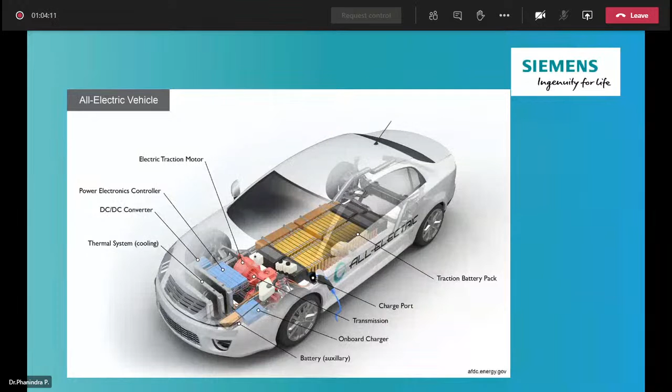Kamlesh, am I audible? Yes, you are perfectly audible. Oh, okay. I thought even the signal was lost. The format is that we have kept all the attendees mute at present. During the question answer session, I will give the permission to unmute. Oh, okay. I'll definitely be responding to your questions. Thank you, Mr. Aqleem.

So now, as I briefly said, digital twins are the replicas. Now coming to the heart of the subject, that is the battery. All this success will rely on the battery. What exactly should battery manufacturers be focusing on? If you want to develop your own indigenous battery, the first thing one has to address is to come out with a realistic model of the existing battery.

That means you procured a battery. There is a battery manufacturer recently with whom I was sharing the same. They were importing from China, and because of certain restrictions, it stopped. So the company is now in losses, or on hold in terms of R&D. They are trying to get it from the USA at higher prices. So assume you have brought your battery, what is the first thing you need to do? You need to convert that battery into a mathematical model.

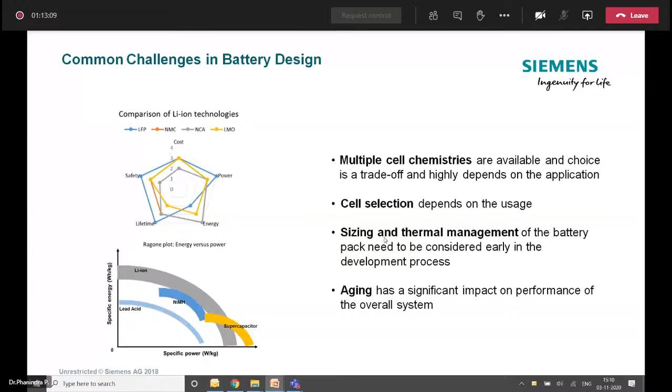So the engineering problems that we need to address: we need to choose a cell chemistry, size the battery pack, characterize the battery cell from experimental measurement, find out its suitability for thermal management, and then find out the electric drive line. Electric drive line means if I have a bunch of batteries in an automobile, how are they connected to give me the effective outcome voltage I am looking for? Series and parallel, we all know.

Can I connect all of them in parallel? If I connect all of them in parallel, I may get a good amount of voltage drop, maybe. Now, if I get that, am I going to utilize all the current in no time? Or if I connect them in series, maybe it will be summing up, so I may get better current densities. Then am I going to utilize the same current densities till my vehicle's last point?

And above all, am I going to consume all the energy density that is available by the time I reach my destination? If that is not happening, then it may be a disaster. We may stop the vehicle on the road itself. Now, how to arrange this and how to connect this is going to play a very dominant role. So drive lines are very important, and at the same time, aging.

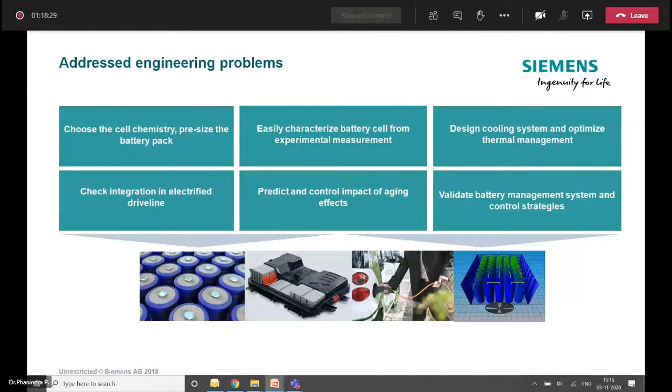So now, when I try to utilize a digital solution, that is a modeling process for batteries, we need to address different levels. The first thing is microstructure electrochemistry. Now, what is microstructure level? I have an electrode, or say layers kept on each other, but these layers need to be manufactured. So when you try to manufacture a particular layer of battery material, electrode material, by doping certain ions, which is your patented ion technology, homogeneity is expected.

But are you going to get the homogeneity right away? It is always verified by SEM technologies, and now maybe some advanced technologies. I personally have seen SEM being utilized for finding out the ionic distribution. So this needs to be verified to find out whether lithium cobalt has been properly and uniformly placed in the collector. It should not happen that it is at very high density in one place and in another place it's not available at all. So the uniform distribution should be there.

For that, absolutely the digital solutions are going to help. At the same time, experiments are also done in this area. A very large number of experiments are going on. And the second one is, okay, fine, at the electrode level I have a chemistry ready. Now, can I develop a battery cell? Then in a spiral, or say a pouch battery. These are the two batteries.

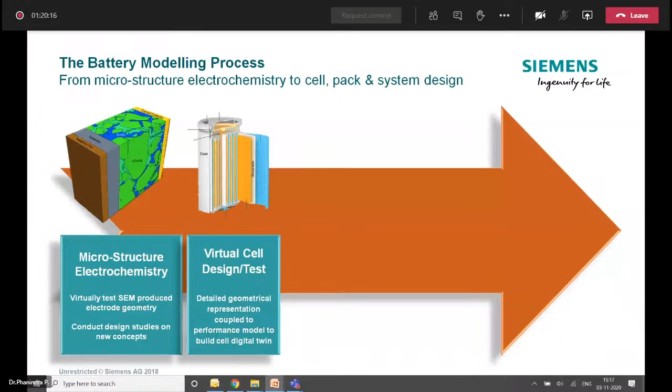Well, what is the pouch battery? A pouch battery is what we see in our mobile phone, in short. And what is the spiral battery? The one that we use in cameras or wall clocks. It will be like that. I'm not saying it is exactly the same, but it will look like that. With different layers, the number of layers and density is different, but the output will look similar. So the wall clock one is like a cylinder battery, and the one you use in the mobile phone is like a pouch battery.

Now with these batteries, once I create them using the electrodes that I developed in the laboratory, is it going to sustain? The biggest question is whether the design is possible or not. For that, we have a dedicated software called Battery Design Studio, in which we create this geometry. We give all the inputs of electrolyte, this much volume, and density, this much volume.

We keep all those inputs, and then the first thing that we are going to see is whether that design is practically possible or not. It may happen that we calculate theoretically that I want to use an electrolyte of say certain ml. I have added them in a solid electrolyte.

I have created doping, everything I have done. When I try to create a battery, my battery size may be increasing by 2 or 3 mm. Now, if we see from a single cell point of view, 2 to 3 mm increase in the battery size is honestly nothing. 2 to 3 mm, sometimes we may say it's a measuring error, right? In our engineering laboratories, we try to do some experiment, we say, okay, 2 to 3 mm is fine.

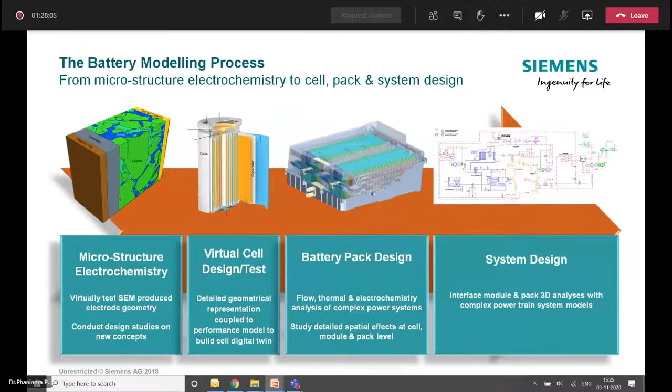So with this, I would like to give an overview of what is BDS, because along with the product, I would like to discuss its possibilities, what can be addressed by the product, and at the same time, what is happening in the real world that cannot be addressed. This way, I will show from an industry point of view what things are possible.

And the alkali part is the leftover area from an R&D point of view. It has been found from experiments that alkalis are highly corrosive. That is the reason many countries are not interested. But when it comes to India, I strongly feel alkali should be the area we focus on, because from a mineral point of view, we are blessed with a lot of alkali metals. That means utilizing indigenous materials could be an area. So our software BDS can also be utilized to incorporate those inputs from the laboratory.

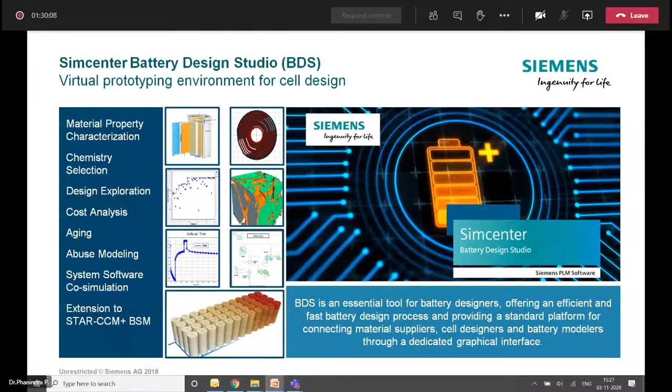So what we generally do in any battery pack analysis at my place is take BDS, design the battery here, and then export it for thermal level analysis.

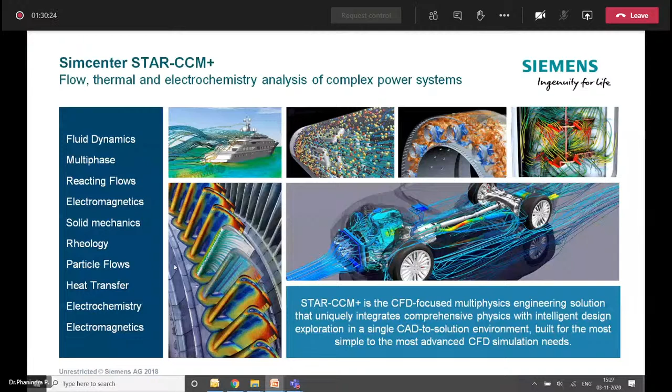Thermal level analysis is done in three-dimensional computational fluid dynamics software, STAR CCM+, which can address fluid dynamics, multi-phase reacting flow, solid mechanics, rheology, and so on in detail. AMESim is used as a one-dimensional tool where we try to use all of them and then go for system level synthesis.

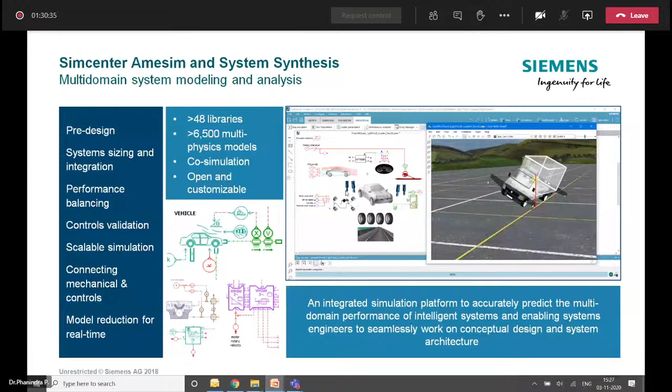We try to create electrodynamic potential models and see how these ionic movements happen in clusters, how they form a deposit, and how effectively the entire surface area of the battery is utilized. This kind of binder network analysis and lithium concentration, how much total concentration, we try to extract. Honestly, this is an R&D area.

When I was speaking to Kamlesh, he told me to share R&D areas too, so I'm just sharing. Please don't take me the wrong way. I know there are many faculty members here already well versed with all these things, so don't take me the wrong way. I'm just sharing what I know. You can correct me if I'm wrong, I'll be happy to learn from you.

Having said so, battery concentration is going to play a dominant role. A very recent update is Tesla: initially it came with a smaller battery size with high energy density, and they launched a vehicle that became a revolution, called a 2019 revolution vehicle.

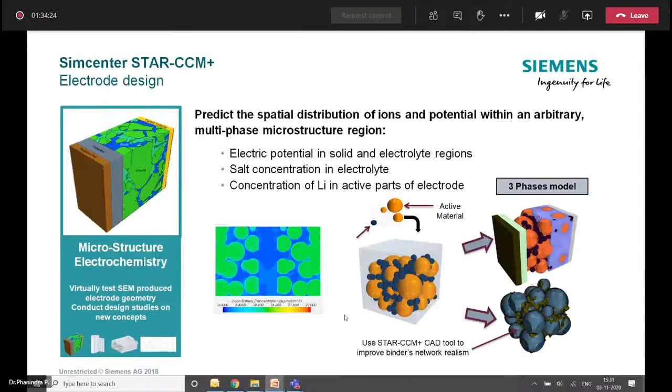The next area is developing equivalent circuit models. How can you develop an equivalent circuit model? We have duty cycles: I will charge to some voltage, then allow the battery to discharge. For example, I receive a battery of 5.5 volts, I discharge it for a particular time, and we measure the drop in overall charge. This is called the duty cycle.

When we import a battery, say from China, Europe or the USA, how do we develop a model for it? We take the battery, conduct a duty cycle test on it, and find how the voltage drop varies with time. Similarly, how current density varies with time, and power density varies with time, and then we fit these into established mathematical models.

So once we try to develop these equivalent circuits, we try to refit in the BDS and see whether the entire battery is represented - whether the battery representation along with the electrode and thermal management is appropriately represented in terms of voltage and current varying with time. We should do all these cross verifications. Once you have a battery and a model, believe me, you are the king of that particular subject. From there, all the down-the-line R&Ds, that one particular input will open doors for 100 opportunities in terms of thermal management, like what you are seeing here.

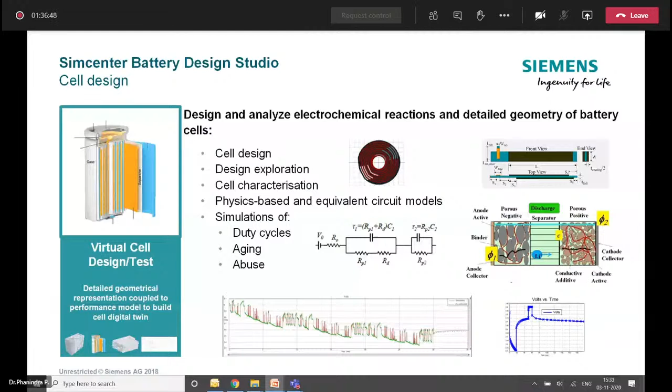But of course, when it comes to thermal simulation in his thesis - naturally he did this a long time ago, now he would have become quite senior - in those initial days, he was trying to take a uniform conductivity of the batteries. Uniform conductivity means in the lateral direction the heat conduction is very high, but in the longitudinal direction he gave very low resistance... very high resistance, so he was forcing the heat to move. Whereas practically, anisotropic conductivity exists for batteries. So from a thermal management point of view, finding out this effective anisotropic conductivity of the battery is again a challenge - one more R&D area.

A lot of models are trying to come out. Some say electrothermal simulation, others say 3D distribution and complex cooling system models are developed. But still, if any of you are interested in this R&D, you can take it up as a challenge - come out with your own isotropic or anisotropic models of conductivity within the batteries. That is one more area, because using these, all the software can find a very good feasible thermal solution.

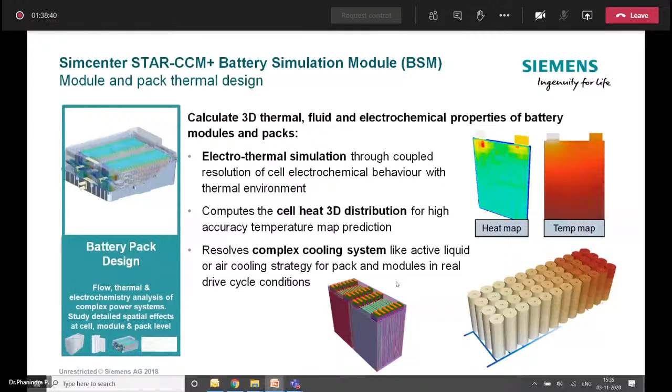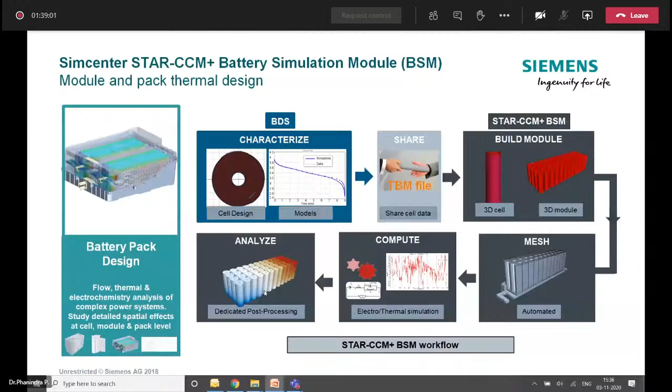Now after this, we take the process like this: using BDS, we create a cell, build a simulation model, mesh it, compute, analyze it, and then take it to the next level - AMESim. Honestly, AMESim is the last stage currently where you will be testing. Any automotive major industry will have a number of licenses for this, because they have to test it before it goes to final outcome - the production, pre-production test phase.

At that time, they try to find system level solutions, where we find various mathematical models developed at battery level, battery pack level, as well as the integration of the battery pack level, and if you're developing your own indigenous vehicle altogether. Like IT students coming out with their own self-balancing, auto-balancing vehicle - it's a very good vehicle, they don't need a stand. The vehicle stands still without using an actual stand, using an effective ABS system.

So if you come out with such a thing, you need to develop a mathematical model for all that, and then it needs to be validated and incorporated in software like AMESim, or if you have MATLAB, you can develop it effectively. That is again a pending area where dynamic models, static models, aging models and so on and so forth are being developed rapidly across the globe, and the door is very widely open. It's an ocean, honestly.

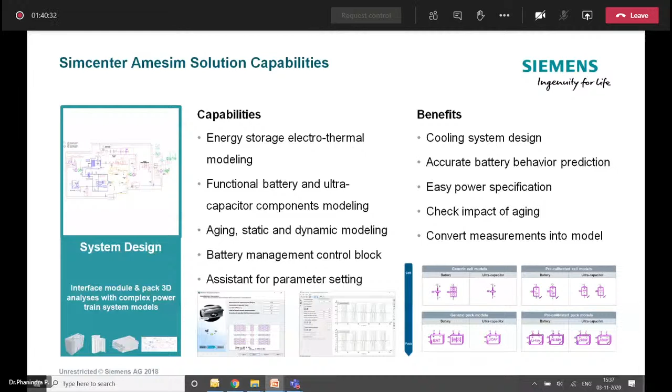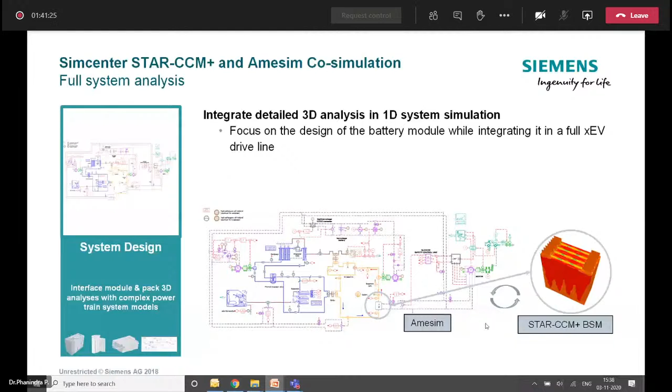When we try to use these two effectively, we can find out with a very good analysis, the full XEV - simulation wise electric vehicle driveline - the entire thing has been found with coupling both these things. Sometimes we also try to use Star CCM Plus, component level integrated with the system level, and then we ask for optimization. As I was referring, in the HEEDS multidisciplinary design optimization, we try to give a task wherein we find the most suitable component configuration that can really fit at the system level also. We create all these as design variables and incorporate it. This effective combination helps much more in saving by all means. So like this, as I was telling, with HEEDS MDO, we try to do designs.

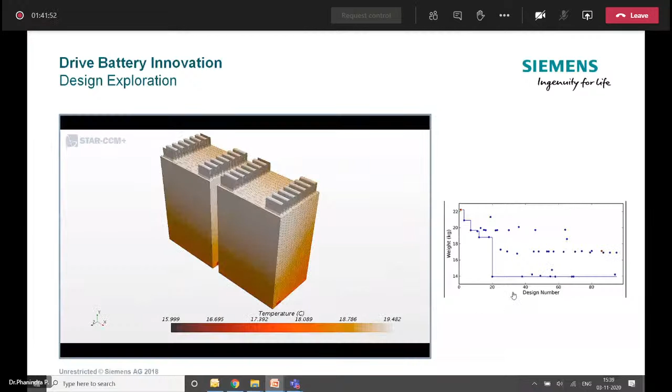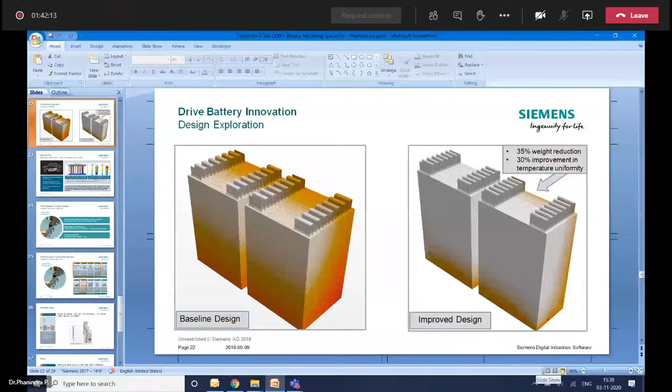Now we have a challenge here to reduce the size and increase the thermal capabilities. You can see the temperatures at different sizing combinations as we vary them, and we wanted to reduce the weight also. So we found various designs and combinations using digital methods, and found the optimum design. The reduction in weight was found to be 35%, and 30% improvement in uniformity of temperature. This was achieved easily using the multi-design optimization approach, which includes Siemens' Sherpa algorithm, a patented algorithm we utilize for achieving these tasks.

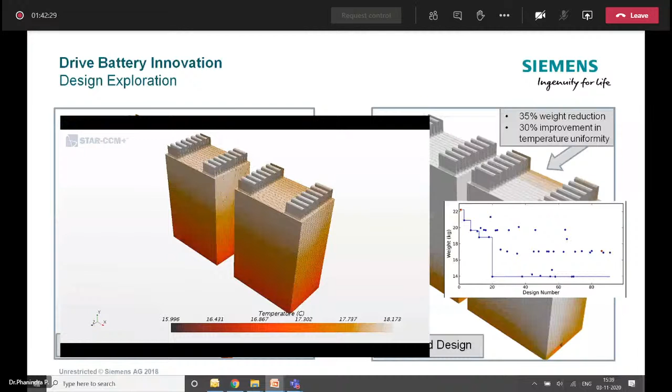There was another vehicle manufacturer, if I'm correct, Hyundai. They tried to come out with a car where, instead of these battery packs, they fit a big pouch cell battery that could take care of continuous electricity supply for about 480 - that was 500 - kilometers. That was their stake. But what happened with both this and the big pouch battery was that the biggest challenge was structural stability, which I haven't briefed here.

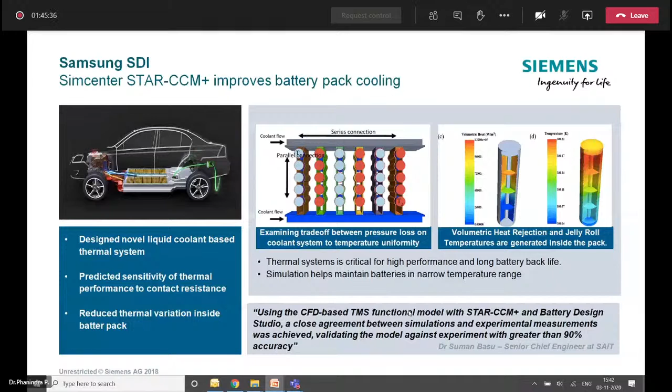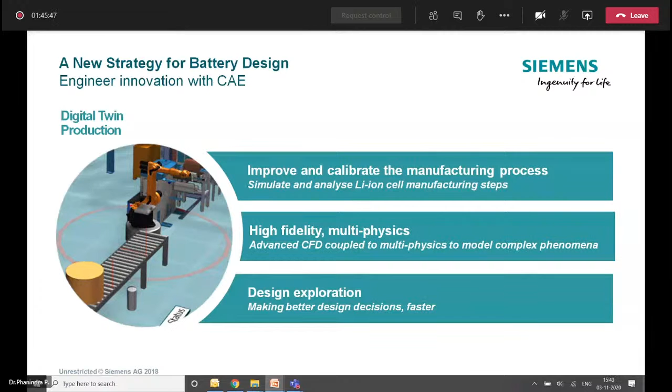So when I try to see digital twin production, it is more about calibrating manufacturing, high fidelity multi-physics and design exploration. So now I'll move on to the next one, where we will discuss challenges like this. That means electrolyte I want to fill. Can I effectively fill electrolyte very fast with a design that is suitable for filling it very fast? I mean, it may have uniform.

If you keep a cylinder, it may occupy all this volume. Instead of all the volume, I want to use a volume that will carry optimum space. So such component manufacturing decisions need to be taken. So CFD analysis can help you in design optimization. But at the same time, whether manufacturing feasibility should be there or not, we will try to see in the next slide.

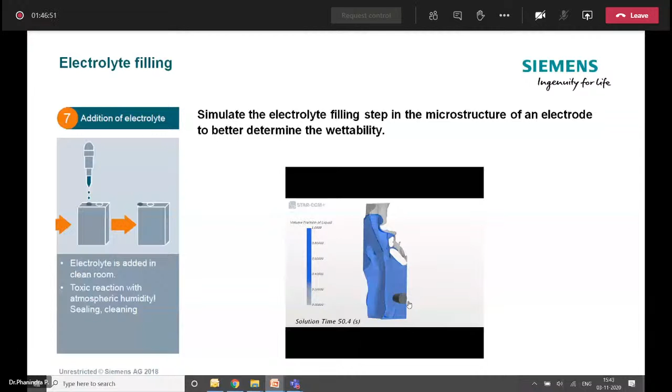So meanwhile, does any one of you have any doubts till now? Would you like to ask, or shall I proceed with the battery manufacturing challenges for a few more minutes? Okay. You can continue. I'll just see if anybody has put a message. No, there is no message. We'll take the questions at the end. Okay, sir.

Now, when it comes to manufacturing of EV vehicles, the challenge is not just the battery availability or its size. It's more about the number of batteries that we can produce and fit in the automotive vehicle, and how fast we can develop the pack and deliver. Say Tata Motors wants 1,000 packs and another company wants 100 packs. These are called contract manufacturers.

Like Amber Enterprises in India is a contract manufacturer for all kinds of air conditioners. You take Samsung, Blue Star, or LG. You buy any air conditioner. Technology will be slightly different, but the contract manufacturer remains the same. That is Amber Enterprises. That's why I guess they are getting popularity nowadays. So similarly, the contract manufacturers are under high stress, so they need to understand how to address these challenges. If you can address the challenges upfront, you can do much better.

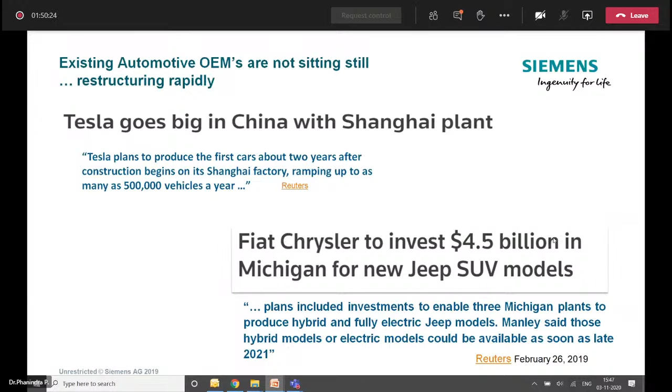So yeah, General Motors are now trying to close some patents and try to launch. And if I'm correct, Wabtec is trying to come out with a battery-based electric vehicle itself. That means a locomotive, an electric train engine based on the battery. They are trying to come out with it. That was an associate of GM previously. Now it is a fully established industry called Wabtec.

The entire electric locomotive is going to be run on battery, and they are trying to manufacture it for those countries where it is supposed to run at -20 to -40 temperatures. It is frequently exposed to these temperatures, in countries like Russia as well as Latvia and other countries which are exposed to these temperatures all the time. There the environment is very precious because of cold temperatures. The emissions from any other kind of thermal power, because of cold temperature, are retained there. They are not going away.

For example, in India, what happens? We have an emission. Because of the hot temperature, the density becomes lighter, and there is a migration, a flow happening. So the carry forward of the pollution is taking place, and as a result, the distribution is happening. In these cold countries, that is not happening. So for them it is becoming a top priority. So the EU majorly is investing in these ventures. Even Russia is investing. And Wabtec is one company I came across trying to come out with a locomotive that can address this issue. And in India, Olectra is a very good bus manufacturing company.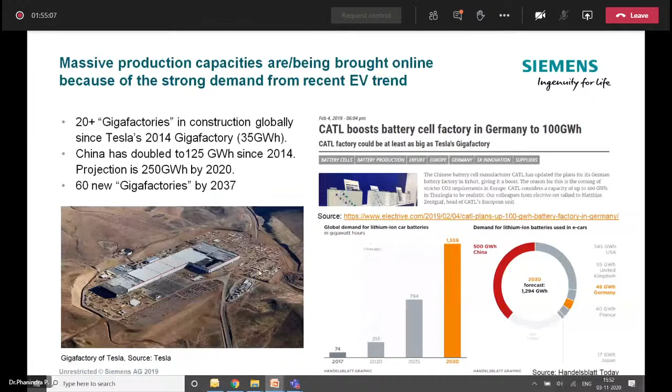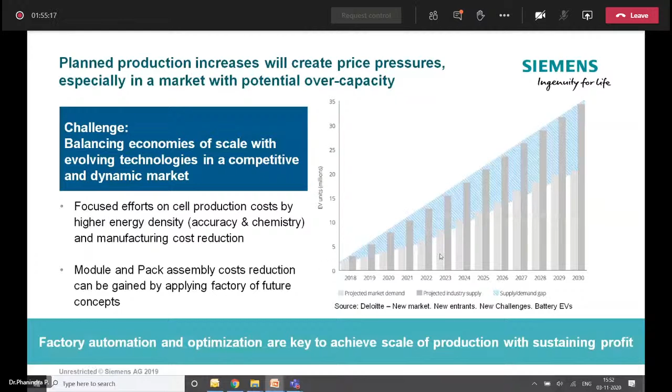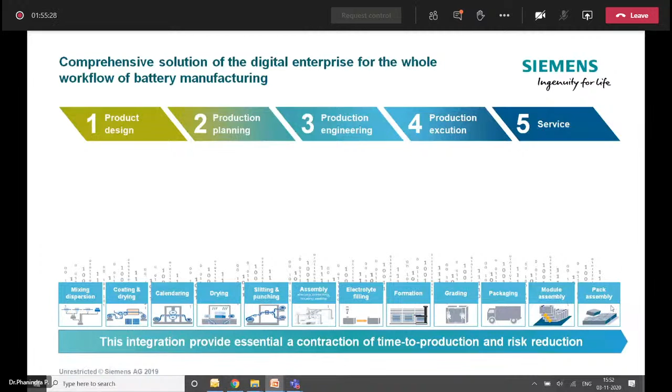To balance the economies involved in battery pack manufacturing, automation and optimization at all stages is designed. Product design, mixing, dispersion, coating, drying, calendaring, drying, all these are very important, and then packaging and assembly. If we design in the digital world, at the battery pack level we can use battery design studio for creating the battery. With integration to the next level of production planning, we can use this as an input to the production world, then production engineering, digital equipment, integrated plant, and service.

Now where does the solution, the Siemens manufacturing solution, actually play a dominant role? If you see from the manufacturing point of view, here is where the human is going to play a dominant role. I mean human intervention, other than software intervention or lab intervention.

So when we look at a very high scale of battery manufacturing: mixing and dispersion, that means achieving homogeneity in the materials, coating of those materials and drying, then punching, then assembling them, electrolyte filling, formation and grading, and then of course the battery manufacturer should pack them appropriately. He may create a battery pack, but the pack itself needs to be packed in hundreds of numbers and transported, making sure the transportation is not affecting whatever we have transferred. Then module assemblies and pack assemblies.

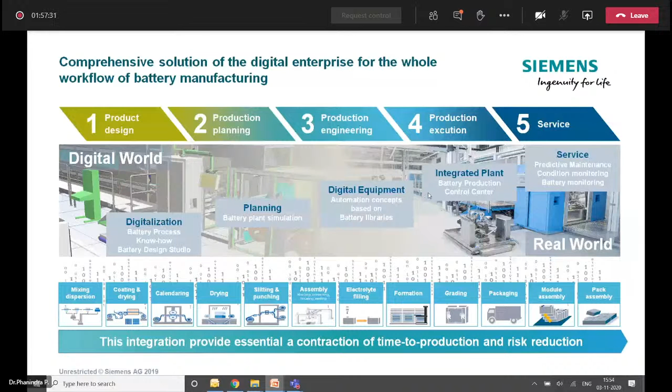So all these become enterprise challenges. They are no more laboratory challenges. Laboratory challenges are more or less addressed in the first step, product designing. From the second onwards till the fifth one, all other challenges come into existence. So these are all again opening a new door of equipment. Unless we digitalize them and visualize them before getting into the original plant, we are going to be hindered. So here I'll show a few of the challenges instead of going into further details, keeping the timelines in view. I'll give you a glimpse.

You can see challenges in new critical components in vehicle powertrains, new volume production speed. You can see how a battery pack is. On the right side is the battery pack. If you open that, they use a lot of robotics. This is how the battery pack looks, and you can see how dense the pack is. Human intervention is very much reduced, because if we increase human intervention, errors increase and the speed can be hampered. That's what many big automotive companies feel. It may be true to some extent, but it is always disputed, of course.

So now how can we redesign and manufacture the process? Automation can be done digitally, so that we can involve robotics and save manufacturing space. That means I want to manufacture the battery pack, but I don't have acres and acres of land for getting this done. In the USA, every plant will have a lot of area, but in India, SEZ and all those things have their own limitations. So optimum utilization of the space should take place. For that, digitalization can really help in establishing the robotics. And you can see we do it at the CAD level.

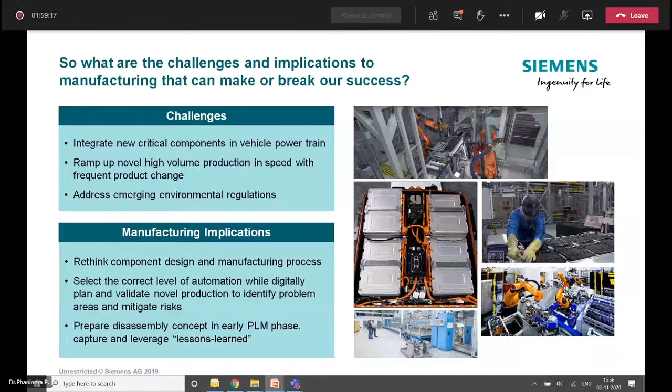Now if we look at the manufacturing of the battery, it's more like we develop in the lab, and then we simply give the draft copies to industries. Nowadays 3D printing has replaced a lot of these companies' raw material processing. So we come out with CAD, integrate it with CAM, and then give what should be the outcome. Very clearly you will come out with a manufacturing process.

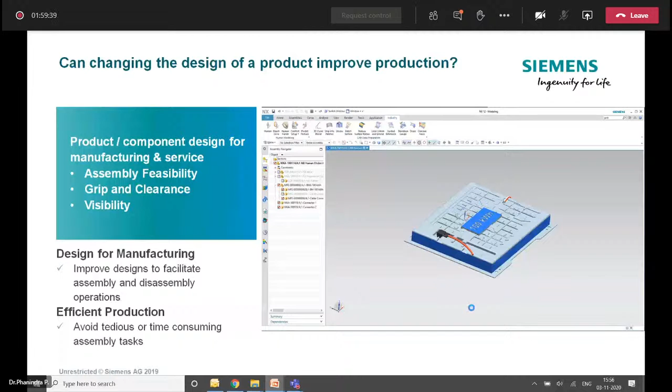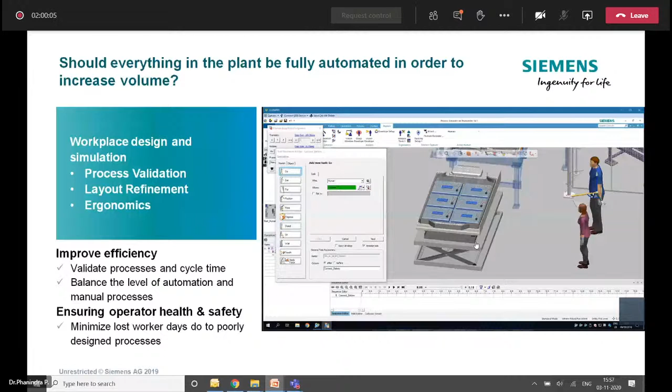And here when we create using 3D printing, we can also see the height of the human beings involved, and whether it is going to hamper the process or not. If the battery pack is moved by an automatic robot, the robot should not hit the human being. So digitalization can help us in really visualizing the manufacturing plant itself. That way the overall architectural layout can be optimized.

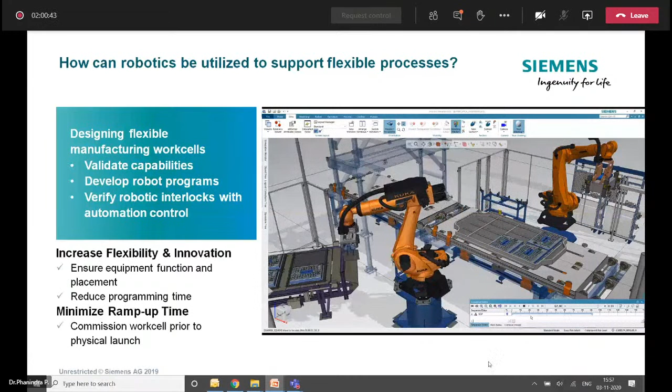And now you can see how the PLM, which is based on CAD, can be used. In the previous picture we had robotics, and here you can clearly see how robotics can be visualized prior to its utilization. The robot on the left side is trying to take out the pack and replace it. It should not go and hit the right one. So this timing can also be modeled. This is called digitalization of the plant, or we say digital twins are produced like this.

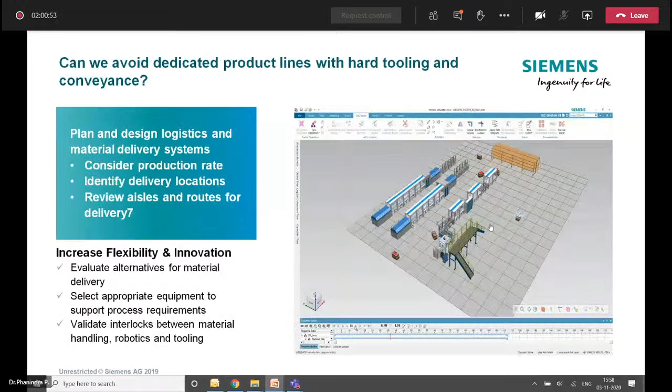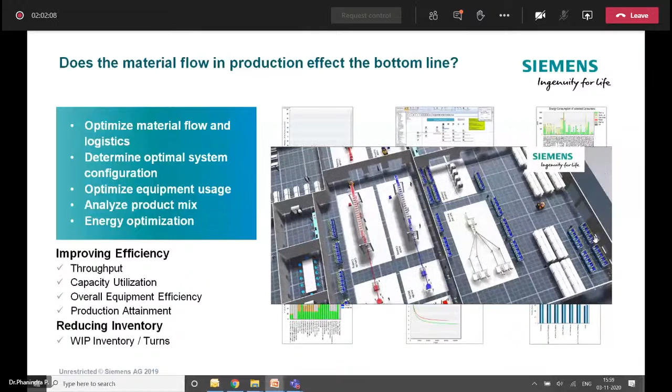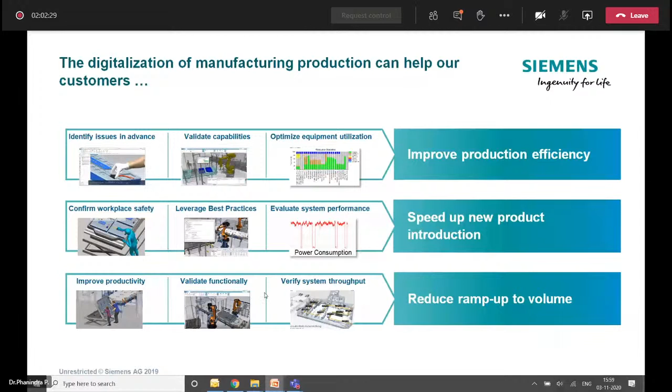So once we try to develop all these aspects, like identifying the issues in advance, production issues in advance, cost issues in advance, and transportation issues in advance, and so on and so forth, we can really come out with low cost batteries manufactured in billions. That's how we can achieve this task.